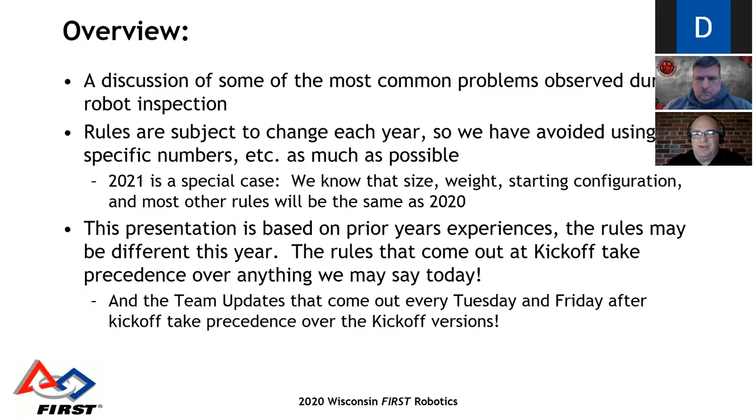So that's important. If you're a rookie team, or even if you're not, I always recommend that you assign one or two responsible students to read those updates every Tuesday and Friday and pass along any relevant information to the team. I also recommend that the mentors read them anyway, just because.

So here's the first update that we know of for this year. This used to be a big long slide about the bill of materials, and fortunately this year I can say you don't have to have one. I'm conflicted on this in some ways, but it's a headache for most teams that is gone this year. It's not guaranteed to be permanent. Headquarters has said they will evaluate how this works, and it may come back.

One of the key reasons for the bill of materials in the past has been to help us enforce the rules relating to overall cost of the robot and individual component costs. So if you show up to my event with a robot with a laser ring gyro on it, you're going to have to prove to me that anybody can buy that for less than $500 or whatever the limit is this year. Even though you don't have to put the documentation anywhere, it doesn't mean you can buy whatever hideously expensive part you want, or have a sponsor give you something that no other team can buy for less than $500.

So moving on, this is probably one of the two biggest issues that we run into every year. There is a weight limit to the robot, contrary to what some teams seem to think.

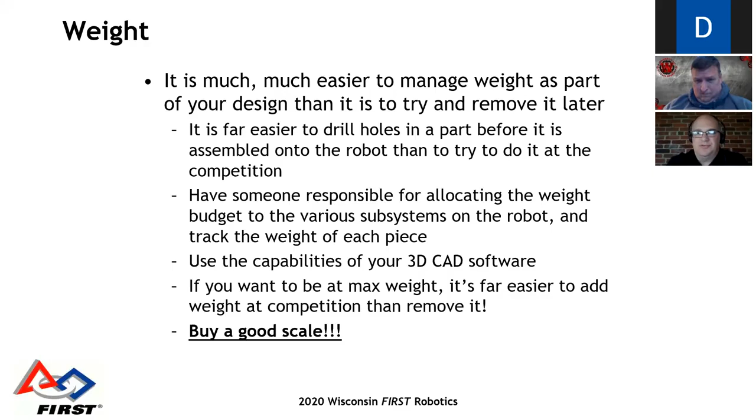Some years you've wanted to be at maximum weight for one reason or another. It's far easier to have a plan to add a pound or two to your robot at the event than it is to try to figure out how to get your robot that's 2 pounds over down to weight. And the advice I give to teams, especially rookies, is buy a good scale. You can get a good one for less than $150 from somebody like Grainger. Whenever teams show up with a weight problem at the event, invariably they either haven't weighed the robot or they're trying to weigh it on something like a bathroom scale. Just like you're going to buy drills and saws and all your other tools, buy a good scale and consider it an important tool.

This is the other one that teams seem to forget. There is a size limit. And speaking of things that constantly change in FIRST, as you can see, there have been several changes over the years. For this year, we know that we're back to the frame perimeter definition, and that it needs to be less than 120 inches frame perimeter. So the next question I always get is, what is a frame perimeter? So if we go here, if you look at this black line here, oops, nope, that's not what I wanted you to do.

Oops. Stupid computer.

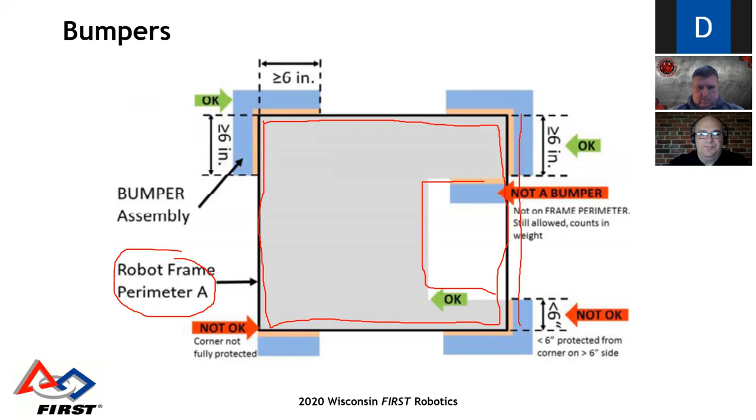So, because there's always some confusion among teams too on how we measure the frame perimeter. If you wrapped a string around it, it does not include indentations in the frame. That was the other reason I wanted to bring that one up. So like right here where it shows this notch in the robot, you do not measure around the inside of that as the frame perimeter. The frame perimeter is the imaginary line that goes from this corner to this corner. That one always seems to confuse some teams.

You know, to be safe, I always recommend that you aim for at least an inch under size. Just in case you have one of those Harbor Freight tape measures that doesn't quite measure right or doesn't measure the same as my tape measure. Every year we have somebody that shows up exactly at the size limit, and then we go, oh, you got to put a guard on this, or you're missing something. Then all of a sudden they're too big. So give yourself a little bit of margin.

This is another one. Robots can be rechecked at any time, so make sure you don't have it get bent out of shape. Fortunately, we no longer have the sizing box, but there was a time years ago where we would put the robots back in the sizing box before eliminations, and it was amazing how many robots didn't fit that fit a day and a half earlier. This also can be an issue if you go to multiple events or if you practice with your robot in between events. It may get bent out of shape, and just because it passed inspection at the first event doesn't mean it will fit.

This is the other one that seems to be getting a lot of people confused. The rule says minor protrusions less than a quarter inch are allowed in the bumper zone. Basically, that means you can have bolt heads or nuts sticking out of the frame behind your bumpers. It doesn't mean that 4 feet in the air, you can have a mechanism that hangs out a quarter inch.

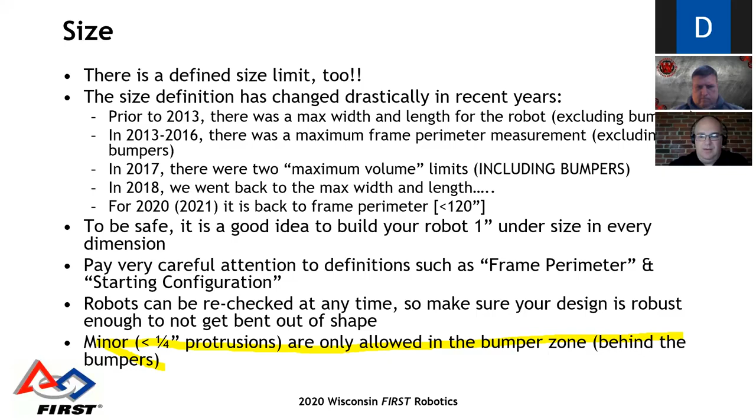Okay, so bumpers. This would be the other reason teams have inspection issues. And I could talk for about 2 hours just on bumpers, but we're not going to. I say follow the requirements shown in the current rules. However, I will be the first to admit that what is in the current rules is less than clear. So not going to go into great detail. If you have questions on whether or not your bumper construction or your creative bumper idea is going to be legal, just shoot me an email, send me some pictures.

But these are the things we run into all the time. 3/4 inch, not 1/2 inch, not 1/4 inch, plywood or hardwood, not particle board, not OSB, etc. And so a word to the mentors out there, because it seems like a lot of teams send some freshmen off to build some bumpers, double check what they're using, because every year we have somebody show up with plywood that's too thin, or with wafer board. There's a reason for the requirement on the piece of wood, and it is to keep the bumpers from breaking.

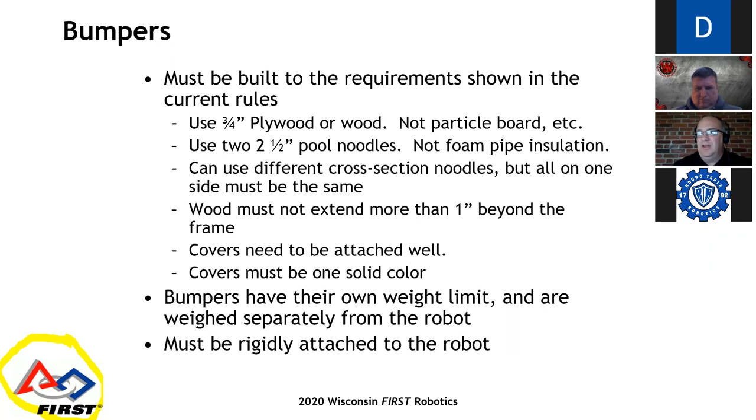for two reasons. One, if somebody gets underneath your bumper out on the field, and all your bumper does is hook over something and isn't attached, it will pop up and fall off, and then the ref's going to reach over and hit the disable button. The other thing would be that you may never plan on picking it up by the bumpers, but when the field reset crew is yelling at you to hurry up and get the robot off the field, sooner or later somebody may grab it by the bumper.

This is an important one. If you're using the kit frame with the AndyMark brackets, pay very close attention to the instructions, because it's very easy to mount the bumpers to the frame using the brackets such that it doesn't meet some of the rules. Bumpers are required to be supported. You need frame at the ends, and you can't have more than 8 inches of unsupported bumper. Again, that's for those cave-in reasons.

And then when it says frame structure, it needs to be something structural. You cannot take a piece of 40 thousandths polycarbonate and stretch it between 2 standoffs at the ends of the robot and try to tell me that's your robot frame. Again, the purpose of this is to keep the bumper from being able to flex in too far and cave in.

Pay close attention every year to the bumper zone height requirements and to the minimum bumper length. This is an important thing to note: like this year, the requirement is that the bumper has to be at least 6 inches long. There's always some misunderstanding on how you measure the 6 inches. That 6 inches is not from here to here. We always have teams that show up because they're trying to maximize their ball intake opening in the frame. So they measure the edge of the bumper and say, well, this is a 6-inch bumper.

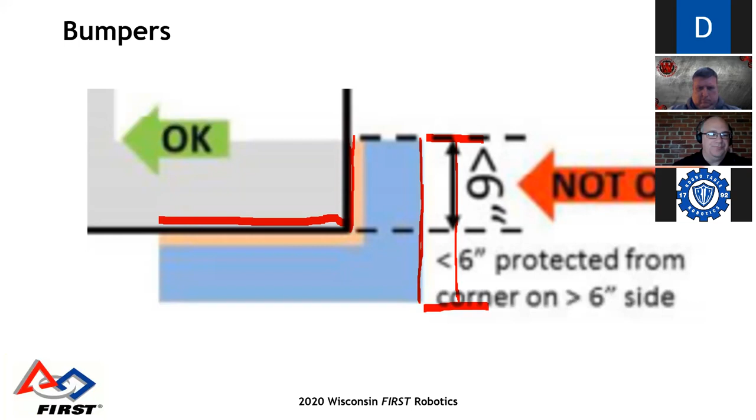The bumpers have to come off the robot for size and weight. The rules have this hilarious guideline in them that bumpers should be removable and installable by one person in less than 5 minutes, 10 minutes. Every year we've got some teams that it takes them an hour to put the bumpers on the robot, and that's a problem, in that it makes inspection very hard, and other things.

Now, especially if teams are swapping bumper colors between matches, if you're going to swap your entire set of bumpers, they need to come off and go on very quickly. If you just have to put them on once, it's okay if it's going to take a little longer, but it still should not take you an hour. The other important thing here to note is that bumpers are one of the most visible parts of your robot.

You can have a beautiful looking robot and then have horrid looking bumpers that have flaps of fabric hanging everywhere, pool noodles showing out in the corners, fabric dragging down on the floor, and it makes your whole robot look bad. Especially now that we don't have to bag the robot up and that you have access to the robot all the way up to whatever competition happens, there's no excuse for showing up at the event with a pile of parts and trying to make bumpers and figure out how to attach them to your robot.

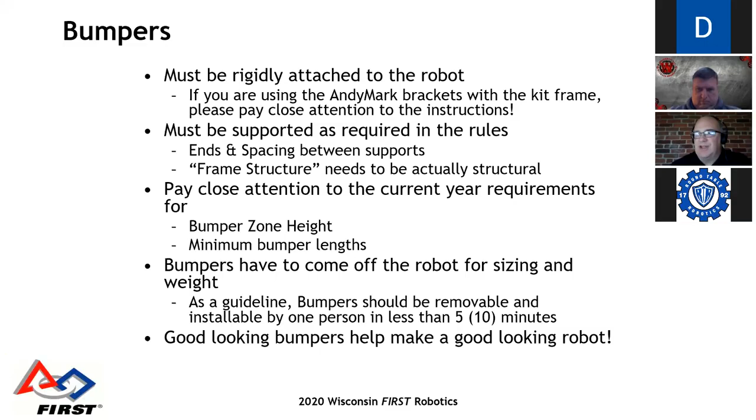So I'm going to pause here for a second. Are there any questions up to this point? Okay, well, moving on then.

Sharp edges. I've never inspected a robot I couldn't find a sharp edge on somewhere. That said, we don't go out of our way to look for sharp edges. So as the words and the rules say, we're looking for ones that could cause injury. We're looking for pinch points, entanglement, and impaling projections. I'm not going to dig down around in the middle of your robot where nobody's ever going to put their hand. At the outside of the robot.

And then what I tell my inspectors is, from an ergonomics standpoint, ask them how they pick the robot up, how they grab it, and watch when the team members go to lean into the robot to pick it up, because naturally, and this is easier to show when I'm in person with a robot, when you bend over to grab the robot to pick it up, naturally your head leans in. Make sure there's no small, sharp things pointing out that's going to stab somebody right in the middle of their forehead. Look at where they say this is where we grab the robot to pick it up. Okay, double check that for sharp edges.

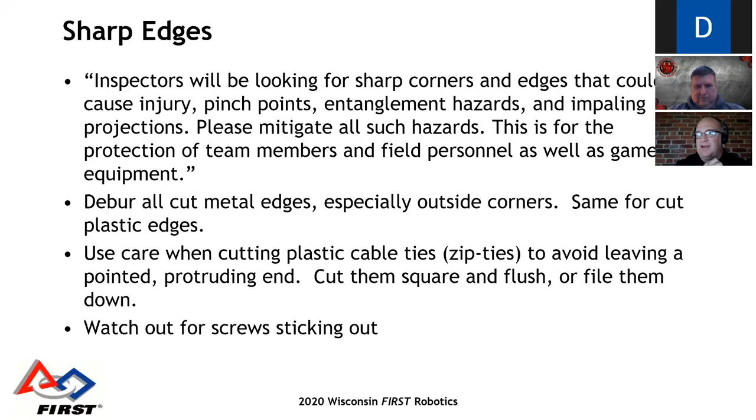The other one would be watch out for screws. In particular, last year my team built our robot out of plywood, so there's some wood screws in it. Well, if you use a wood screw that's too long, that leaves a really nasty sharp point sticking through the backside of whatever you put it on. So just watch out for those things.

Team numbers, believe it or not, we fail a lot of teams for team numbers. They have to be visible from all 4 sides of the robot. This is where what gets teams is the rules specify a height and a stroke width. So, if the rules say 4-inch with a 1/2-inch stroke width, then 2 inches tall with a really fine line that you drew on there with a paint pen isn't going to do it.

Numbers are important. This is how the announcers identify your robot. This is how, importantly to your team, other team scouts identify your robot, and this is how the judges identify your robot. So, the number is important. You need to get it on there. It's your team's identification. Be proud of it.

Don't do creative things. Don't try to take a 0 and make it look like your round Warrior Bots logo there. We've had teams try to do that. No stylized characters. Some years there have been rules regarding whether or not you could split the number, like, can I have a 5-1 on the left front bumper and a 4-8 on the right front bumper? That has changed at times over the years, so pay attention to that on a yearly basis.

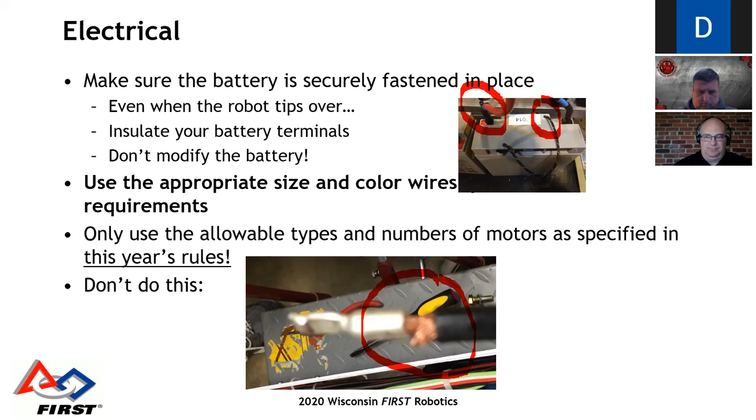Electrical system's got to be isolated from the robot frame. This is easy enough for you guys to check as you're building the robot. Take your ohm meter. Every team should have an ohm meter. Unhook the battery, close the main breaker, and measure from both battery terminals to the frame.

Okay, this one's not a rule, but we recommend that you label your circuit breakers in the PD, label the wires, so that when the wires fall out, you know where they should go back in. This is a rule. Mount the PD so that we can see it for inspection. We need to check what size wires are connected to what breakers and what size breakers are connected to what motors. If we can't see it for inspection, this is a problem. We have made teams move them, or I can make you take the robot back apart even, so we can get to it.

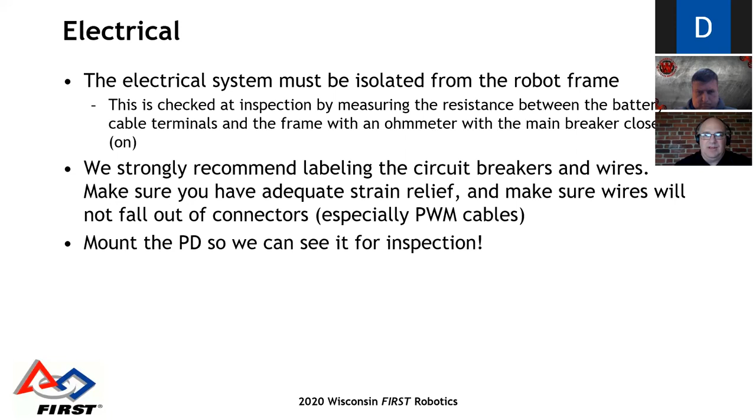Not going to worry too much about the radio this year, because we'll worry about that if we actually get to have events where we get to use a real field. But just make sure you're using the right radio. This is one that teams run into problems. Pay attention to the instructions on how to hook it up, because it needs a certain amount of power or it will flake out, and mount it so that we can see it.

And you need to program your radio at each event. Just because you programmed it at the event 2 weeks ago doesn't mean it's got the right security key in it for this week. They're regenerated every week. The other one would be for rookies or new teams. Once you take the robot to an event, when you get it back to your school, it's not going to work. You're going to need to reset the radio so that you can clear out the encryption key.

Pneumatics, and I know we're getting close to 10 minutes left. Compressor not operating right is one of the most common problems that we see for failing teams. You gotta hook it up to the pneumatic control module, or you can use one of the old spike relays. You cannot wire the compressor directly to the pressure switch. Yes, it works. It works for a little while. It will not work forever.

The compressor pulls 15 to 25 amps at compressor startup, depending upon the compressor. The little micro switch that is in the pressure switch is rated for 1 amp. Eventually it will fry. The other reason for this being that when we disable the robot, the air compressor needs to disable. And if you wire it directly to the pressure switch, then we lose that safety factor.

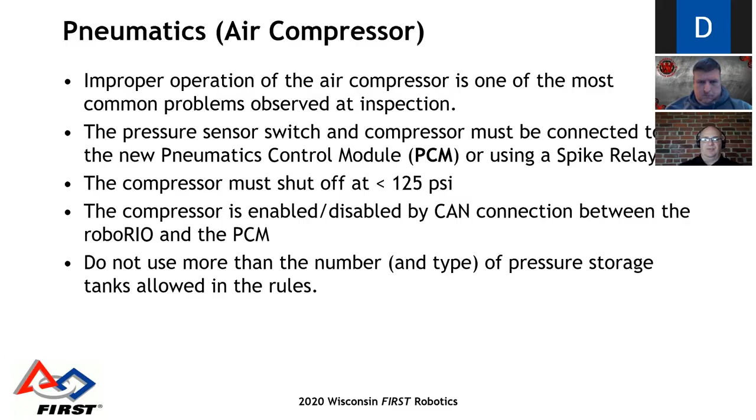And then, the rules on these have changed over the years. So don't use any more than the number and type of storage tanks allowed in the rules any given year.

There's an overpressure relief valve that is specified in the rules. You've got to attach this directly to the compressor. This cannot be at the other end of a few feet of flexible pneumatic tubing. The reason it's there is because if something goes wrong and the compressor runs full time, we don't want to overpressurize the system. And if the compressor runs too much and gets too hot, we have had the plastic pneumatic tubing melt, which is why we don't want the overpressure valve downstream of that.

There are minimum pressure ratings given in the rules. These have changed a few times over the years, so I just say it's got to meet whatever the rules are. And then this is an important one: do not modify any pneumatic component. Basically, the only tool that should ever touch a pneumatic component is the wrench that's the right size to screw the hose attachment fitting into it. If you're touching a pneumatic component with any other tool, stop and ask yourself why, because you're probably in violation.

This includes painting. You cannot paint the pneumatic system components. The reason for that is if you painted it, I have to assume that you're trying to hide damage. And as LRIs, we have zero leeway on these pneumatics modification rules because this is driven as a safety issue. If you painted your cylinder, I'm sorry, you're going to have to replace it.

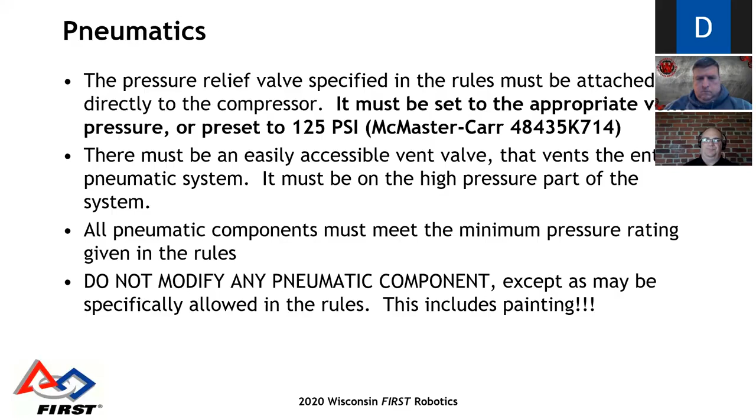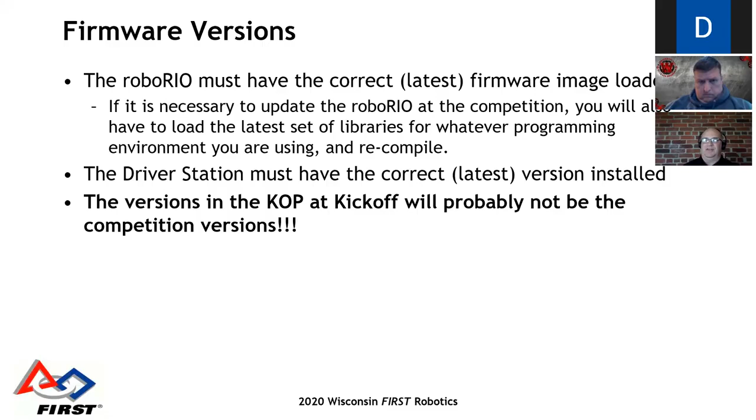Firmware version: you always have to make sure you have the latest or the correct version. And in general, the version at kickoff is probably not going to be the version that will be in use by the time the competitions start. So to summarize here quick, and then we'll get to questions. There's an inspection checklist released every year. Go ahead and get a copy of it and try to pre-inspect your robot.

When we get to your pit to inspect your robot, we tell the inspectors to only talk to students. First thing I do is throw all the mentors out of the pit. I will only bring a mentor back if we have a major issue and I want to make sure that they understand what I'm telling the students the issue is and what they need to do to resolve it. So make sure you have team members that know the answers to the questions.

The other one that gets us all the time is a team will come up right before lunch and say, we're ready to have our robot inspected. Okay, next inspector will be over in a few minutes. The inspector will get over there in 10 minutes and find out that the only person left in the pit that the team didn't take out of the venue to go to lunch is the website developer. That's not going to be an inspirational experience for that poor student. Make sure you have students available for inspection that know the robot and know the systems.

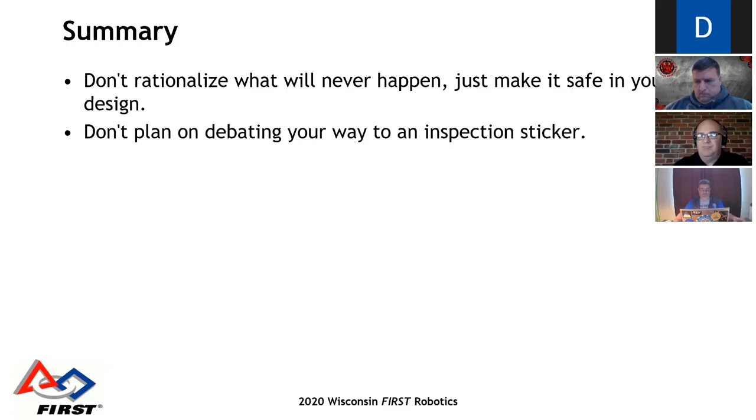Don't plan on debating your way to an inspection sticker. I'm not a lawyer. I am an engineer. If you think you have a creative interpretation of the rules, that you're going to try to bend the rules farther than I'm willing to bend them, again, don't think you're going to debate your way to a sticker. And this one is important. This is in the manual. Decisions of the lead robot inspector are final.

So if you ask for a second opinion and the lead robot inspector comes over and tells you no, then that's it. Now, understand that before I tell you that something's not legal or your really cool design feature is illegal, I'm doing everything I can. If it's not explicitly illegal by the rules, then we allow it. We're not looking for how to make things illegal.

And then, if I'm not sure, I've already been on the phone with the chief robot inspector. I've possibly been on the phone with headquarters. We have access to all of those people. So if the lead robot inspector comes over, looks at something and says, I need half an hour, I'll get back to you, that's what we're doing. We're trying to figure out some way, some creative interpretation of the rules, that we don't have to make you change something.

But if I walk up and say that's inherently unsafe and it's not legal, don't go complain to the regional director. Don't go looking for the head of the planning committee. Don't go to the FTA. They're all going to tell you the same thing. What did the lead robot inspector say?

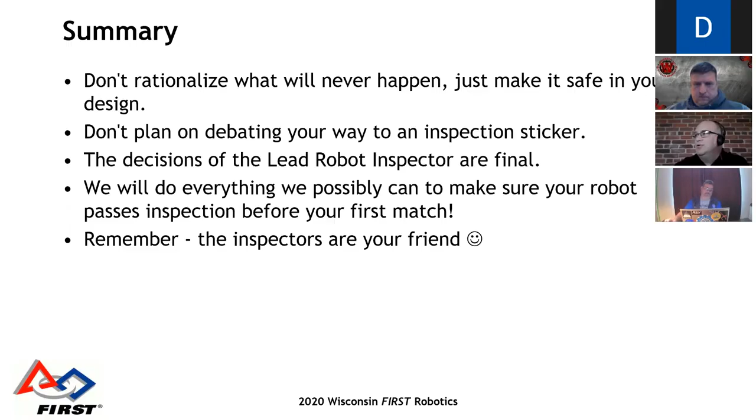I know we're right at the end of time. Oh, I guess that was my last slide. Are there any other questions before I let everybody go back? Otherwise, as I said at the beginning, once the rules come out at kickoff and we know a little bit more what's going on this year, we'll host some more sessions. To be honest, I hope I get to look at some robots in person this year, but I'm not optimistic that we will have any events where we actually have to inspect a robot this year.